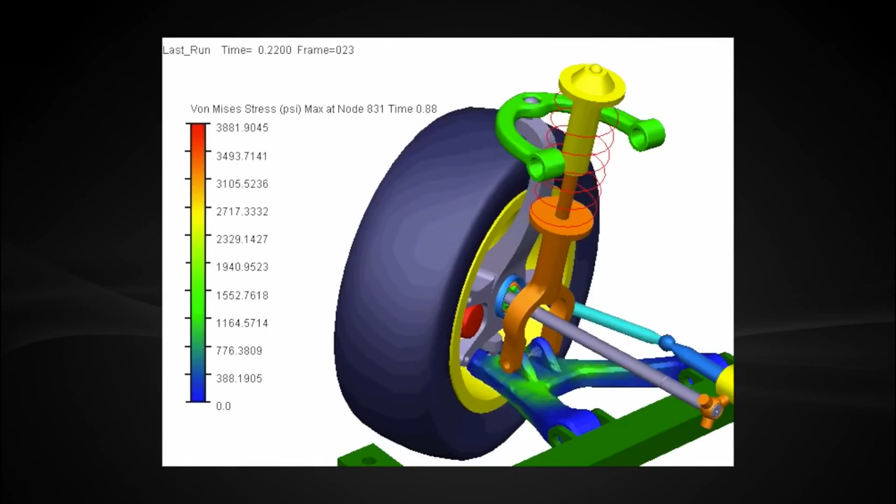Reason 10: ADAMS is the most widely used mechanical systems simulation software. ADAMS stands for Automatic Dynamic Analysis of Mechanical Systems. It is a multi-body dynamic software that is used to study the dynamics of moving parts and to determine how loads and forces are distributed throughout mechanical systems.

With 3 decades of innovation and industry leadership, companies across all industries choose ADAMS as their system dynamic solution. For example, in the automotive industry, ADAMS is often used to perform vehicle ride and handling tests, rollover predictions, loss of control simulations, powertrain dynamic analysis, shift quality evaluation, and so on.

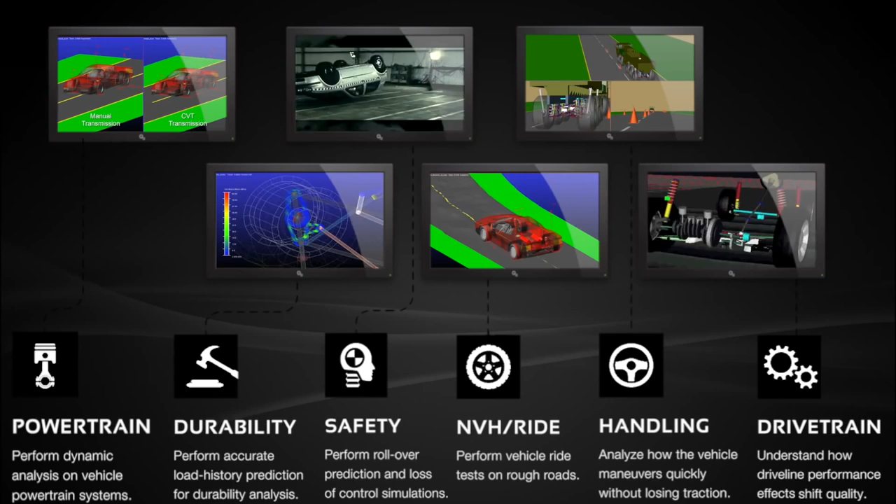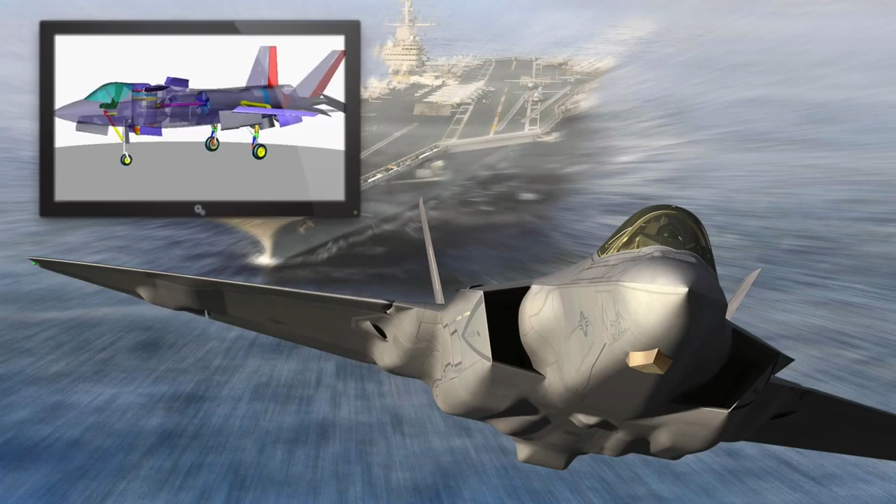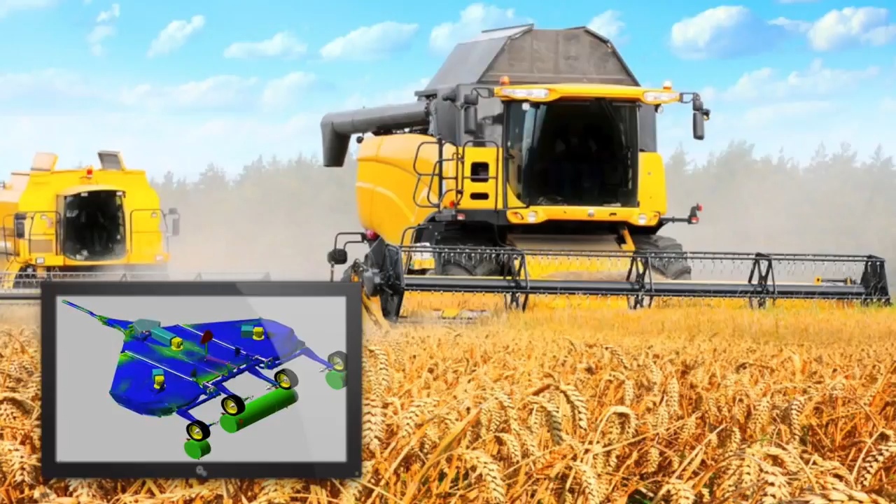In the aerospace industry, engineers apply ADAMS to perform dynamic analysis of the landing gear, control surface systems, takeoff and landing events, arresting cable systems, and vertical takeoff jets. In general machinery industries, ADAMS is utilized in many areas, like mining equipment, crane systems, agricultural machinery, escalator systems, gear train mechanisms, machine tools, and many more.

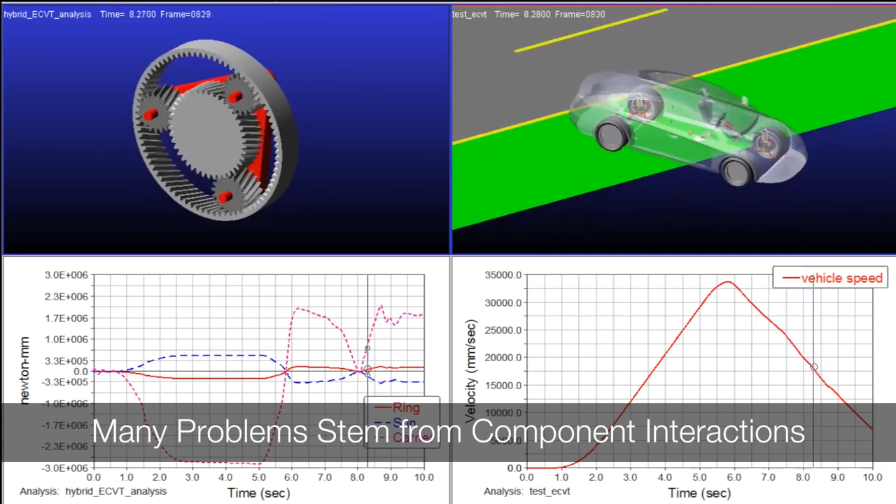Reason 9: System level analysis. Many problems stem from component interactions. For example, brake noise once caused a warranty issue on a certain type of car. However, the brake supplier couldn't replicate the noise on bench tests. Then by analyzing the braking system and the suspension system together in ADAMS, engineers were able to find out that during certain events, the brake was exciting a natural frequency in the suspension, which produced an audible brake moan. In this case, engineers would have never been able to solve the problem by working on the component level instead of the whole system.

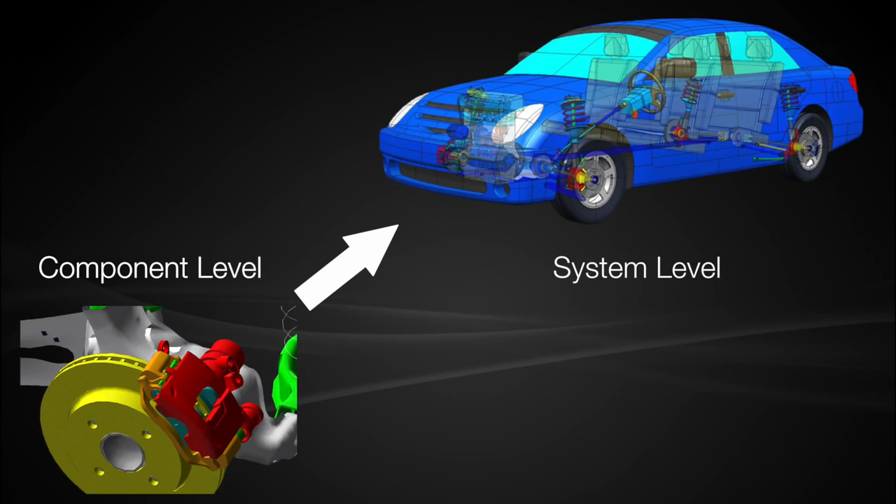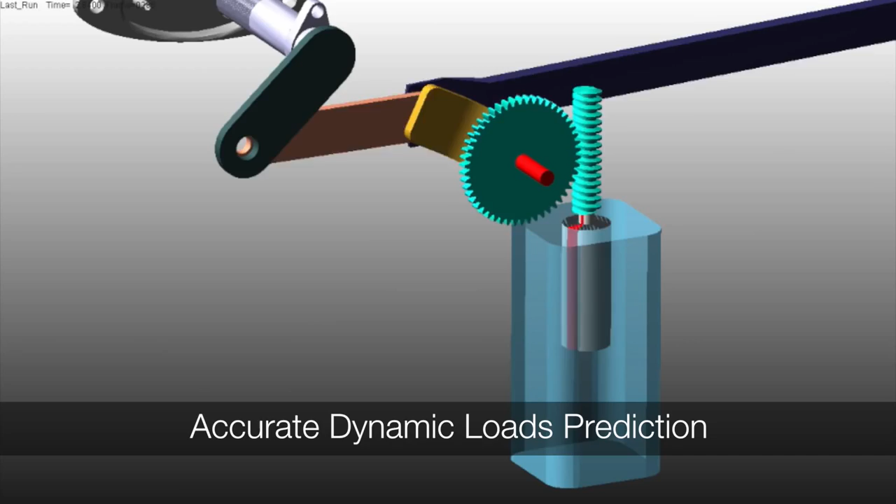Reason 8: Accurately predict loads for FEA. Dynamic loads are far more difficult to predict than static loads. This is especially true in systems with multiple moving parts, complex interactions, and dynamic phenomena. Using ADAMS, engineers can calculate accurate dynamic loads applied through the system to any key component within it. Then, those loads can be used as inputs to component FEA models to get reliable results for stress analysis or fatigue analysis.

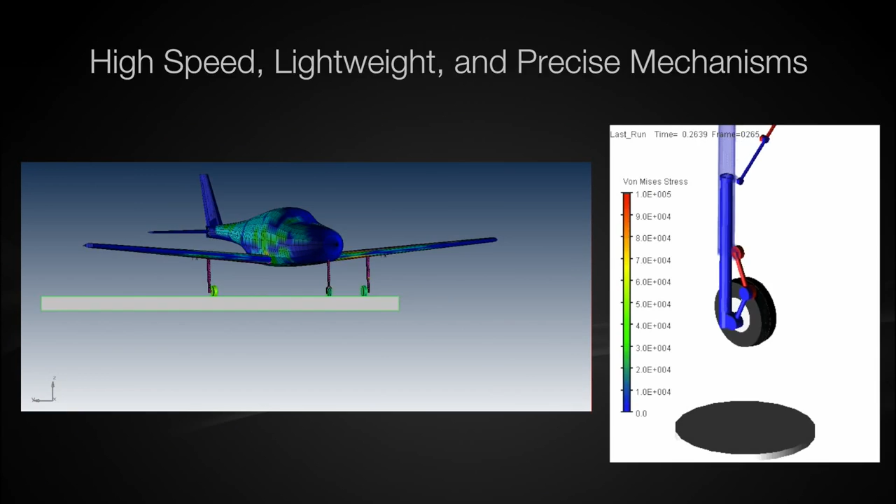Reason 7: Conveniently represent flexibility in your system. More and more, greater emphasis is being placed on high-speed, lightweight, precise mechanical systems. Often these systems will contain one or more structural components where deformation effects are paramount for design analysis. In those cases, representing the flexibility of those key components results in a more precise loading prediction and improved system performance. ADAMS allows you to create flexible parts conveniently, even in large motion systems that include complex interactions with other modeling elements.

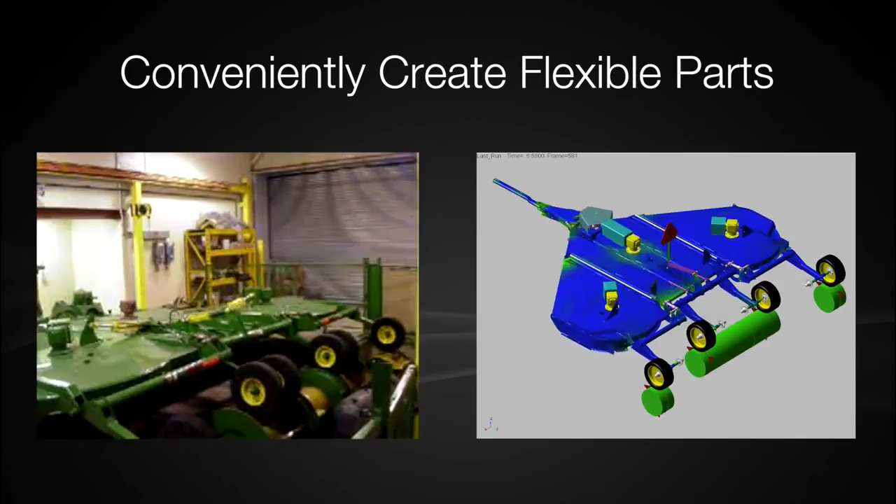Engineers can either create a flexible component by importing MNF files from FEA software, or generate flexible parts within the ADAMS environment using the ADAMS ViewFlex capability.

Reason 6: Design confidently with accurate mechanical models for control system modeling. Nearly every mechanical system includes one or more control systems. By using ADAMS Controls, you can take your geometrically defined ADAMS models and easily incorporate them within block diagrams you have created with your preferred control systems design software, such as EASY5, MATLAB Simulink, or FMI-supported tools.

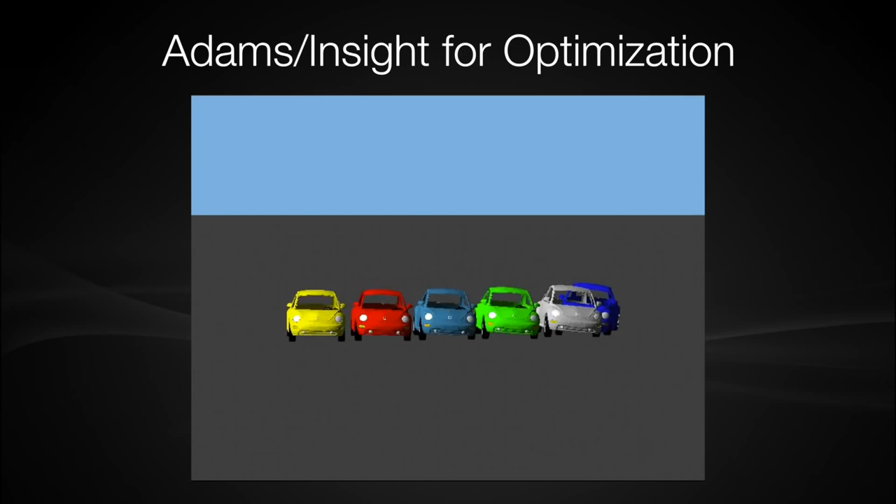Reason 5: Accelerate innovation by exploring multiple design concepts. Optimization analysis is important in every design process. Using Adams and Adams Insight, your design team can quickly understand the simulation that was run, investigate which factors have the greatest effect on each response, and easily make design changes and immediately understand how these changes will affect the overall performance of your design.

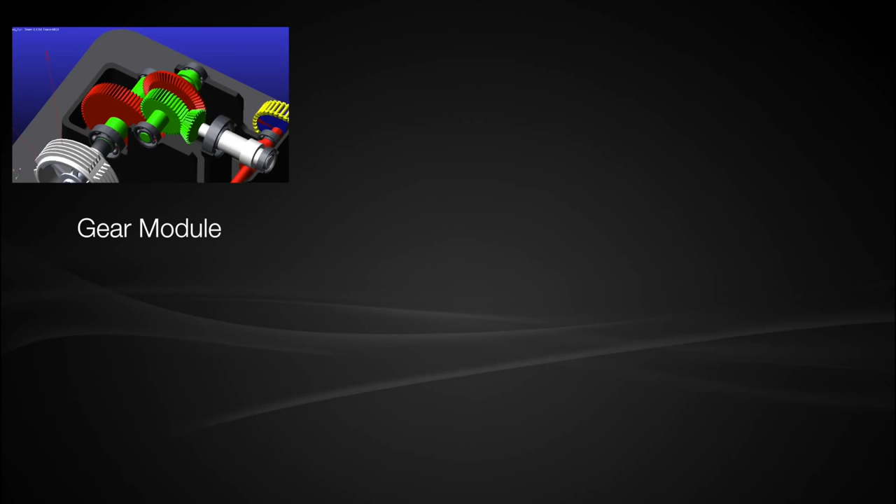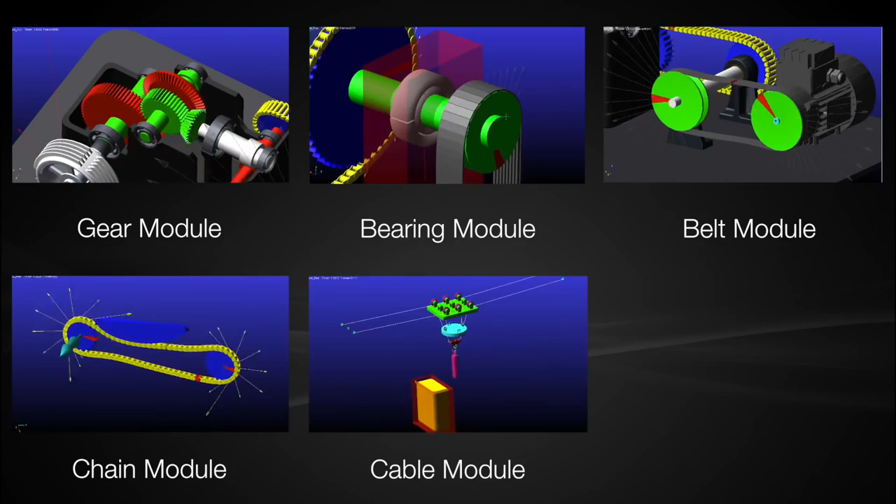Reason 4: Productivity package for machinery components, modeling, and simulation. Adams Machinery is an analysis software package that is specifically focused on machine design. It allows users to build functional virtual prototypes from typical machinery components much faster and to predict system dynamic responses with high fidelity.

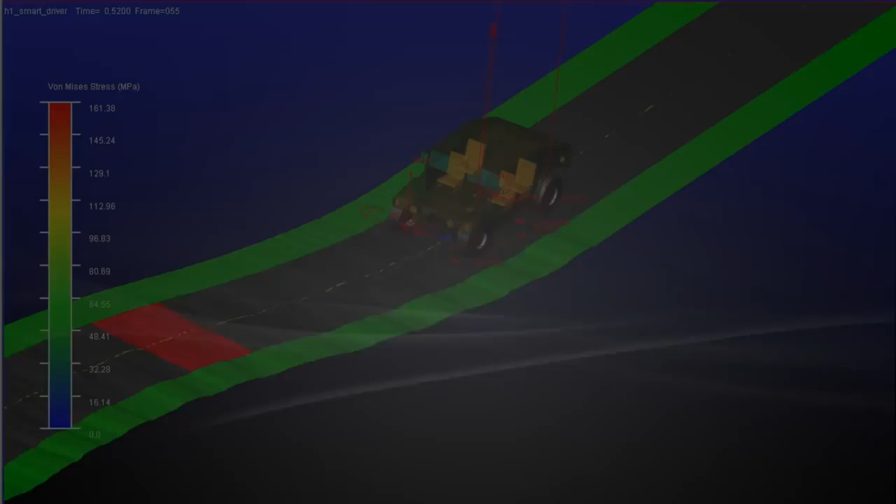Reason 3: Real dynamics for vehicle design and testing. With the Adams Car products, engineering teams can quickly build and test functional virtual prototypes of complete vehicles and vehicle subsystems. Working in this environment, automotive engineering teams can exercise their vehicle designs under various road and testing rig conditions, performing the same tests that they normally run in a test lab or a test track, but in a fraction of the time.

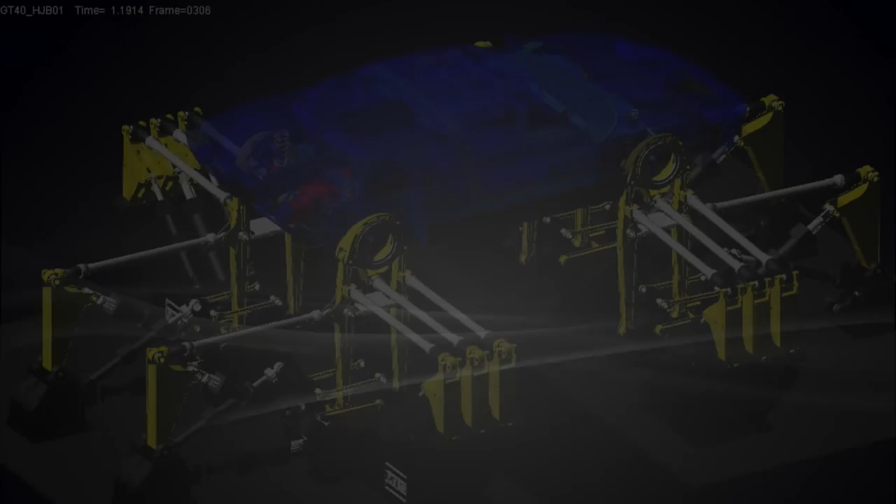Reason 2: Powerful customization functionality. Another advantage of Adams is its openness of architecture, which provides the ability to customize. This is heavily used by many companies to extend the capabilities of Adams and to integrate it into their process workflows. All functional and simulation steps can be customized and extended from the interface to automation scripts for modeling, solving, and post-processing, all tailored to your specific application.

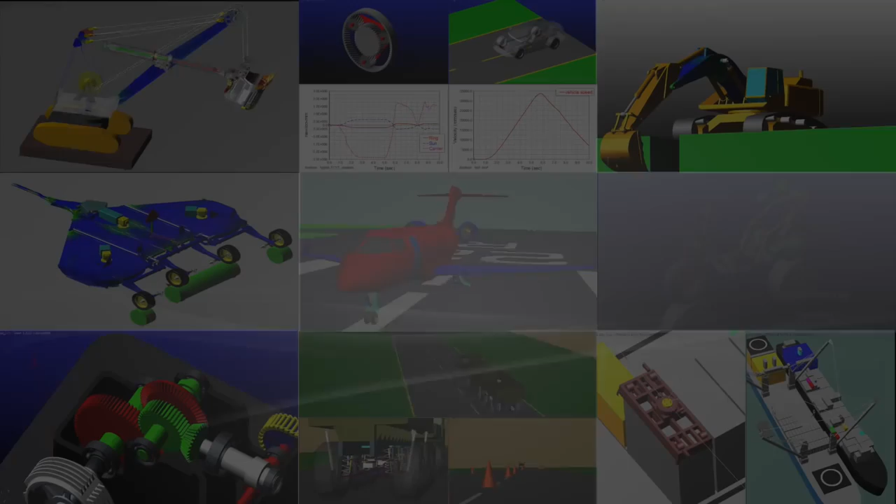Reason 1: Every engineer can evaluate and manage the complex interactions between disciplines, including motion, structures, actuation, and controls, to better optimize their product design for performance, safety, and comfort. Adams improves engineering efficiency and reduces product development costs by enabling early system-level design validation.